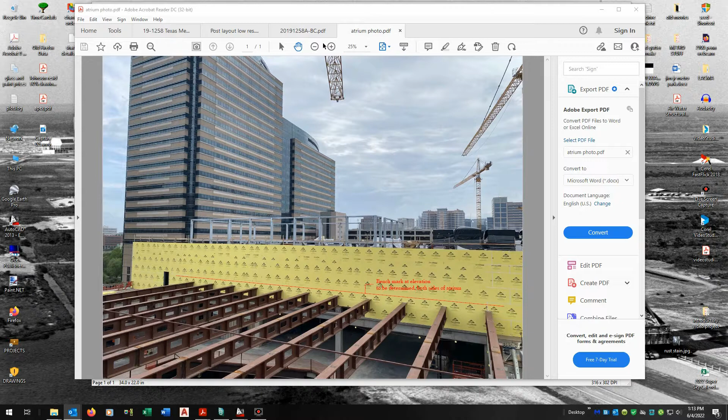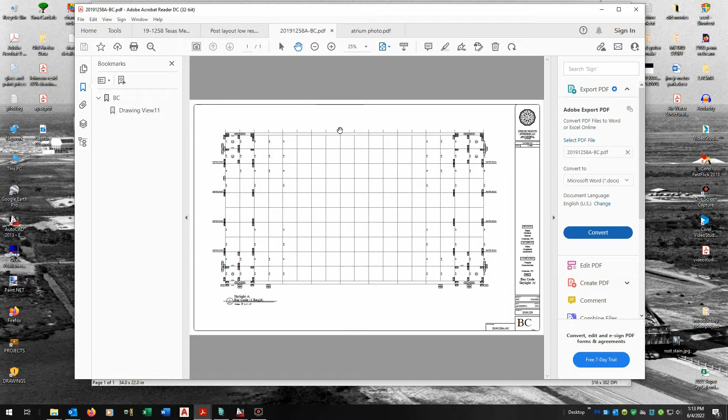The only other thing, this is our barcode sheet. I find it a little hard to read because it's a half plan. At the top of the screen here is the ridge, and at the bottom is the curb, and you'd have to flip it over to get the other half of the skylight. That freaks me out every time I look at it. But let's move on and go to the first place.

This is page 6, which is not running the view right. So you're going to have to find out which wall is I and which one is F. I believe this is the front of the building to the right, and so I would be on that side. We could look for north arrows on the other plan. We do not have a rafter at the center. The center line would go right through here,

and the first post each way is 5'6", 5'6". That's to locate these guys. Then you're going to go 11, 11, 11, 11, and there will be some space from the last post to the sheathing. That space is 11 1/4 from the center of the post to the sheathing.

So I think you should check the opening of the sheathing, make sure what that is. Find where the center of the skylight is, and then work back and make sure these 5'6" align with the holes correctly. You may have to shift the center line a little bit offset, so that if we use it for locating things, it's not setting you up to not align with the holes.

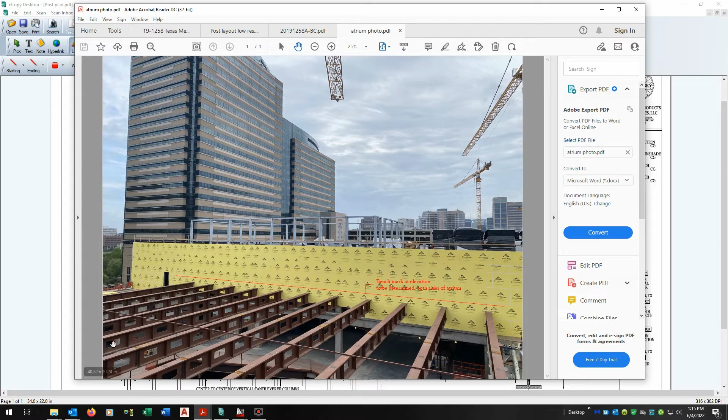Going back to the picture, alignment with the holes is the most important thing, I'm guessing. If we're a little bit off to the sheathing, we can adjust the flashing or something, but that's the first thing to check into. So we've got that, and then, let's make them a different color. I don't know if you're going to do this with snap and chalk lines, but that's 5'6", and then 11, because you're going to want to mark across each of these beams.

This beam in the middle is the ridge line, and again, all you can really do is count 1, 2, 3, 4, 5, 1, 2, 3, 4, 5 to find the middle. There's nothing else that would give it away. So if you would mark that one for center,

you're then going to want to check that each of the beams going over is 11 feet 0 inches on center, because they're going to vary, and if it varies a bit, you're going to have to snap a line to hold the 11 foot, and then do that throughout all of these. So eventually you're going to end up with an 11 by 11 grid, and where those lines all cross is where the posts go. So 11 foot, 11 foot, depending how much they change.

I can't even draw the line straight, but that's going to be what controls. You can't just take center of the beam and assume it's going to be the right position. You're going to need the center line of the atrium, and just like it was important to check from the center line to the sheathing and the hole, you're going to want to check center line to the curb.

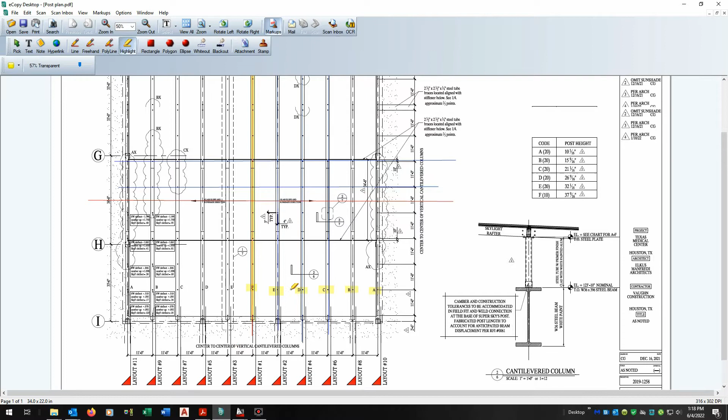So you're going to have a CX that's going to work with a C, and when you get into the layouts, I'm going to tell you exactly where those are. And I've keyed the layouts here, and layout 1 is the ridge line. Layout 2 is going to the right, 3 to the left. 4, second down on the right, 5, second down on the left. So basically number 1 in the middle, and then evens to the right, odds to the left. And I gave you one layout for each beam to work with, because the elevations are different everywhere.

So grids, and I've kind of got to keep repeating myself so I don't get lost, but grids, find the posts. You have different posts to pick. I checked them. The steel guy made them to the right height, I believe. I didn't unwrap them, but they were all very close. The right quantities are there. You have 1 extra F and 4 extra E's in case something goes wrong and we need a different length post. Those extras can be cut to make something that we need.

The F has a pitch going both ways, so I guess that was just in case one of them was wrong or got damaged. We had one more to work with. But the E is long enough that you could cut any of the others out of it. So, okay. Let's look at the... we'll go this way.

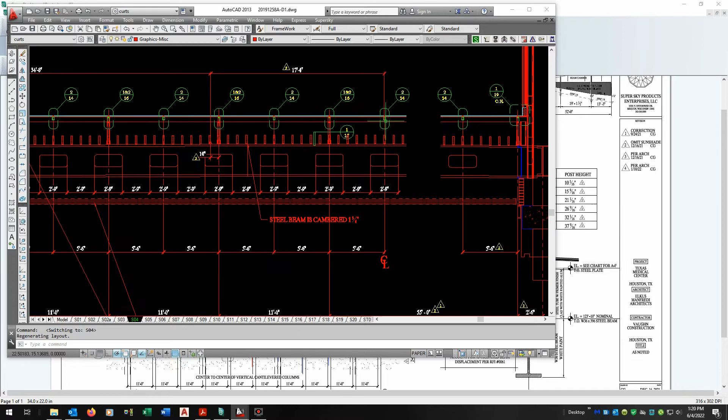So this is section S4 in the CAD file. Here's the center line of the atrium. Again, it's a half drawing. This is the far right wall, and this is the bottom of the page we looked at before. So even our infills should be centered on these holes, but here's the post, the rafter, and these little boxes are a sunshade they're going to put on after us. So we want to make sure that our rafters are centered on these holes as much as they possibly can be, while still being mostly centered between the walls.

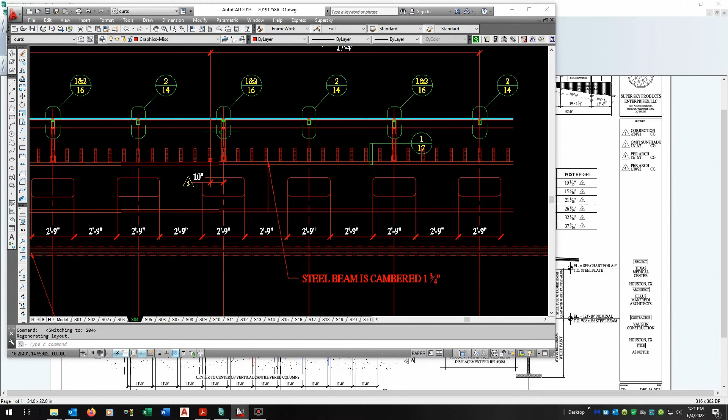So that's the camber. These are right off the steel drawings, so it should be pretty close. We've checked the numbers. Something could still go wrong, but I did check it as much as I could and adjust where we had to. So that's that height.

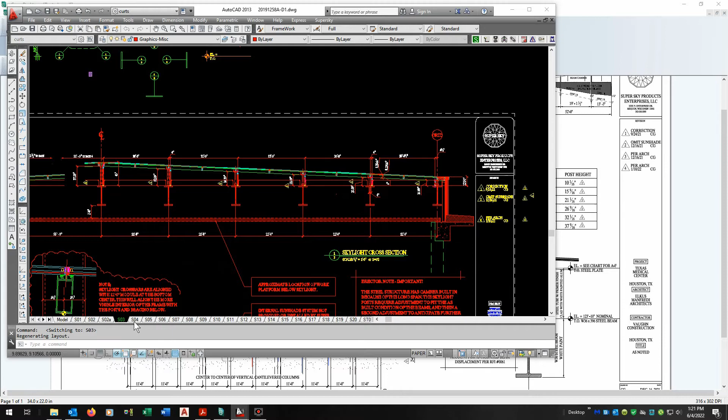Let's look at 3. If you look at 3, this gives you the height of the posts in the skylight after everything's done. So you're never going to be working with 37 5/8, because you're going to have a different number because we're going to shoot high, and it's hopefully all going to settle to create that number. It may be close, but there's so much stuff kind of wiggling around. But those are the nominal numbers for the posts and the place where the posts are centered. And then we will get to the elevations now.

So I've given you all these sheets here with posts and all kinds of numbers. Let's start right here on the top of the beam where I wrote all these numbers. This is based on Vaughn's original steel survey. Now, they're a little squeamish about us using that. I don't think it was very accurate. And what they did is they shot a point here, a point in the middle here, another one here, and another one at the end. So these are all calculated between the different points.

And they're saying the building has settled, so they may not be correct. That's why they're going to give us a new benchmark. But I've written them down here just in case it turns out it didn't settle. We have a way to go back. Now, I'm going to come back to this because I think resurveying every point is probably going to be your quickest way to get this done. But for now, these are just for reference and just in case.

And I'm using them to calculate parts to get us a starting place. So, everything I have here is a starting point. I can't guarantee it because I'm in the office working with bits and pieces of information to get you a place to begin.

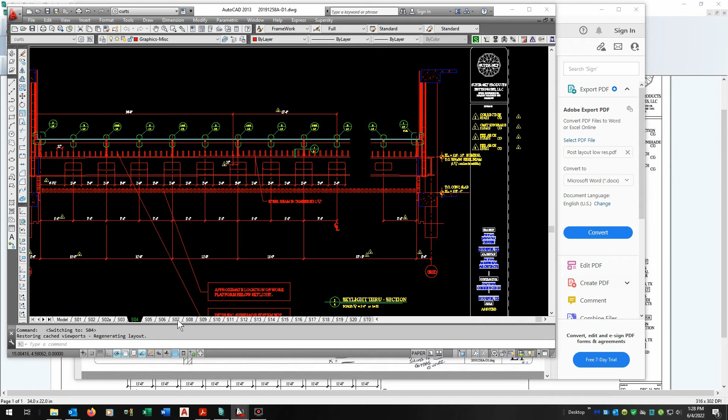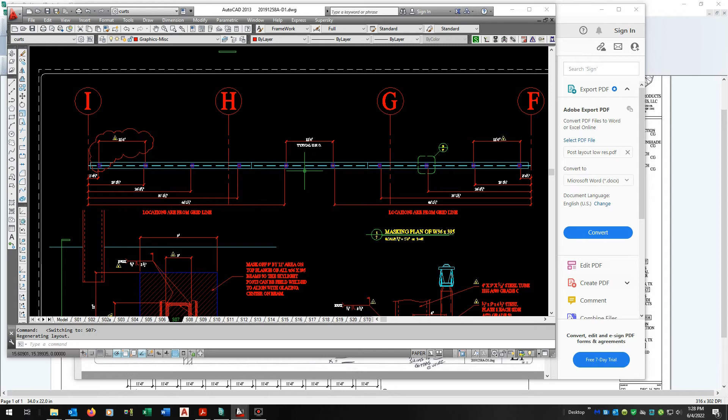The other way to go is the top of the steel. If I go back to the AutoCAD for a minute, we've had them mask off the steel at every post location. So you pretty much know where every post generally is going to go because there's a big patch of masking tape sitting there. And if you wanted to get a guy with a transit, you could shoot elevations off the benchmark and just get the relative height from the benchmark down to the steel at all 110 points. And I'll be able to go back to our layouts. I lost them.

And I could recalculate based on the current top of steel at each point to the shoulder you should have, and I can give you one number, and I think that would be the easiest. It might cost a little bit. You might even be able to get Vaughn to do it.

But if they shot elevations at the beam and you wrote them all down and gave them to me, next day I'll be back to you with heights for every shoulder, and you'll just have to get the posts on the center and measure from top of steel to shoulder, and you'll be good. Burn it down. That's where we're going to want to be. I think that's easier than the strings.

I think it's easier than the laser, but we need somebody to shoot those heights. And Vaughn seems to have some guys on staff who can shoot elevations. Money well spent, in my opinion. It'd make your life so much easier. All you're doing is snapping chalk and then measuring up at the shoulder. Slide in the shims you need to hold the post, and you should be good. They will have the welder come and burn these down.

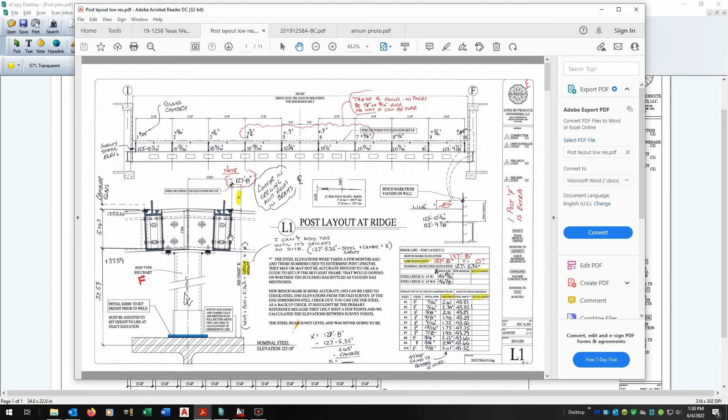So that's what I was talking about in my notes for the 3 different ways to do it. One is locate all these strings at just the right height, just the right location, measure down. Laser kind of does the same thing, and the steel seems simpler. And like I said, you have a layout for every post.

Here's the L2. Now on here, the crossbars come down the slope, so our string line's 127.3, but our benchmark is 127.8. So you'll have to lower 5 inches from the benchmark down to your line. And you're going to see that's going to kind of consistently keep happening. You're going to have all post E on this one. This one uses all post F. This one also has all E.

So here's the one, L4, second one down on the right side because it's even. You got 127.8 as your benchmark. Your line's going to be 126.9. So the difference down is 11 to get that. And then here's where your steel heights, and then your checks for the steel as well. The steel you shouldn't use to set this up on, by the way.

And your post is D unless noted otherwise. And these 2 posts are the DX. And if you go back to that plan 6, they should correspond with where I clouded them. So anywhere there's a special post, I've gone in and I've marked it just DX on where it goes. And I've numbered them all 1 through 10. You can tell by the grid lines where that starts and how that plays across.

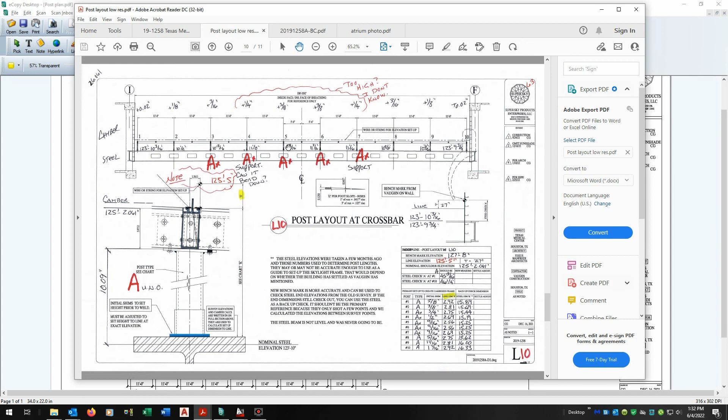I did a lot of these all in one night, so if you start seeing a weird number where they should be sort of gradual and follow a logical way, because the beam, it rises, then it goes flat, and then it rises back down. So it's going to have a little bit of undulating to it and some tolerance, but it shouldn't make big changes abruptly. It should be all little.

I got a little confused with that, but I'm pretty certain we want to do it this way, even though there's a little bit of differences. That's the tolerance playing out. But keep an eye out, and if you start seeing the frame look really weird, let's talk about it. Don't just assume I've got it figured out. Camber's a weird thing, and it kind of freaks me out. So, feel free to call.